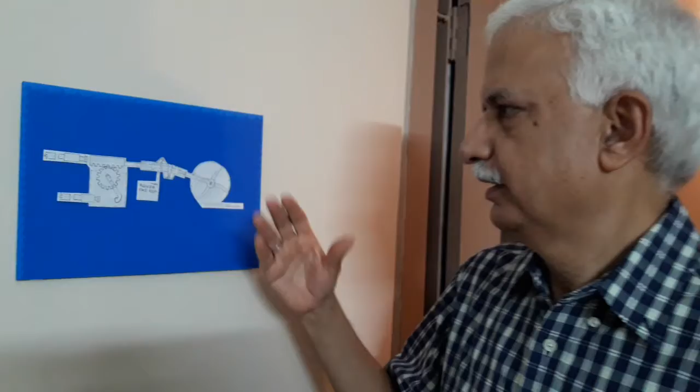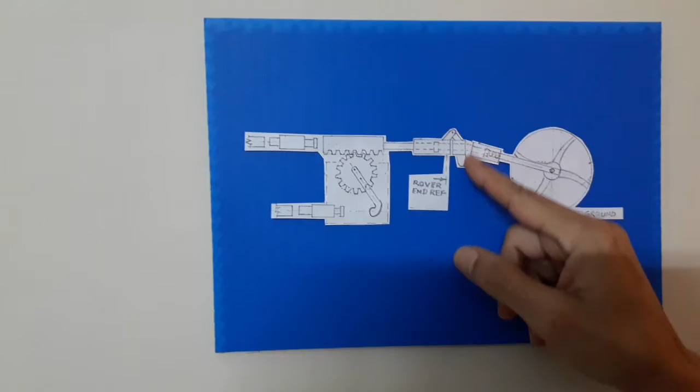Here you can see a spoked wheel mounted on a strut, which is cushioned inside a cylinder and connected to hinge number 1 and hinge number 2. This hinge is meant for opening in this direction, and this hinge is meant for opening in this direction.

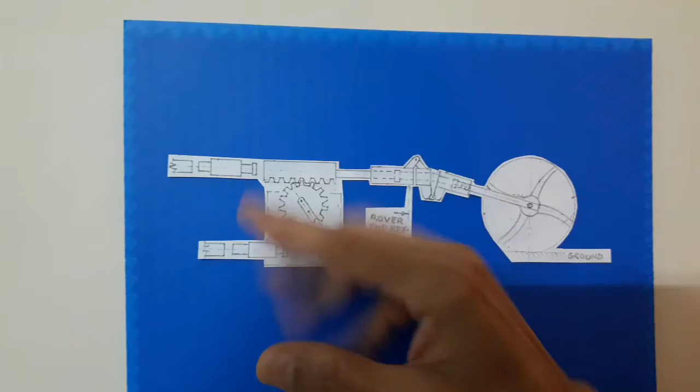Inside you can see a solid shaft which is the strut, a flexible shaft I've used here, and again a solid shaft. Here you can see a rack and pinion arrangement with an actuator, which is going to carry out the pressing of the pin.

So now how does it work? When the rover is moving in this direction, this wheel is going to roll on the ground. Here is the ground. Suppose this encounters a downward slope. Depending on the angle of the slope, the wheel is going to go down.

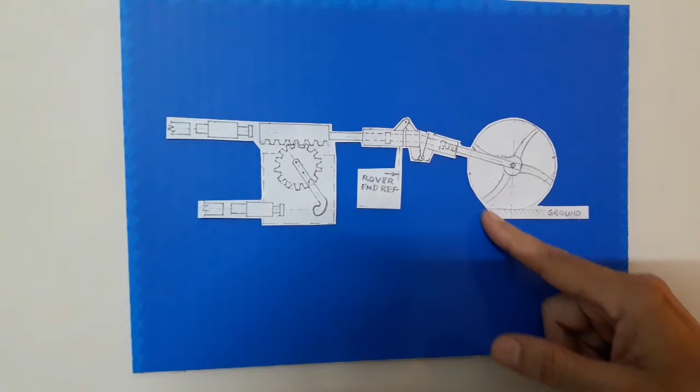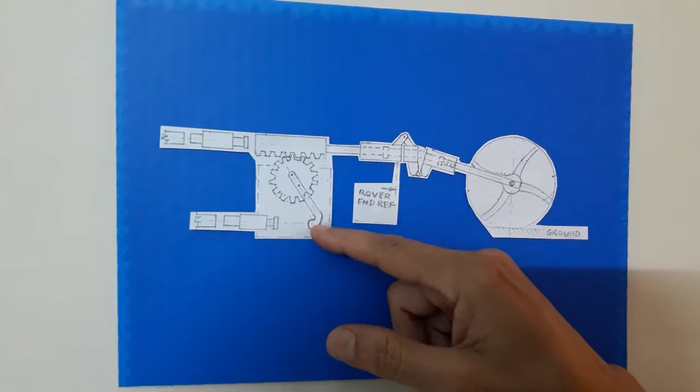When the wheel goes down, the struts move down and stretch the flexible shaft. This pulls the rack in this direction and moves the pinion in a clockwise direction. When the pinion moves clockwise, the actuator presses this ram, which presses the pin provided by NASA on the rover.

So I've talked about the downward movement. Now let's talk about the upward movement. For instance, there is an uphill task, a slope which is going up.

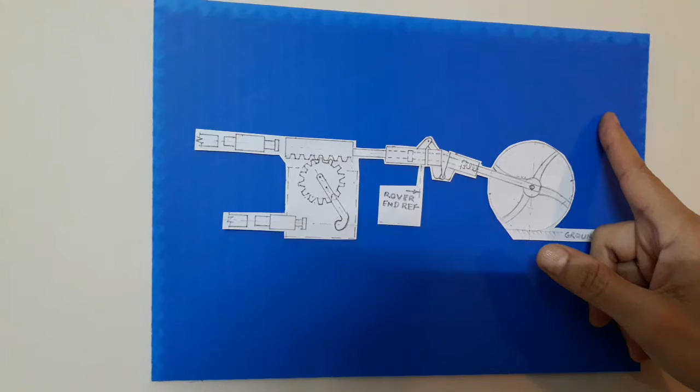The roller will try to climb the uphill journey, and this hinge will close. Now this hinge will try to open depending on the slope. When it opens, again the flexible shaft is pulled, and this pulls the rack in this direction and moves the pinion again in a clockwise direction, causing the actuator to press the pin.

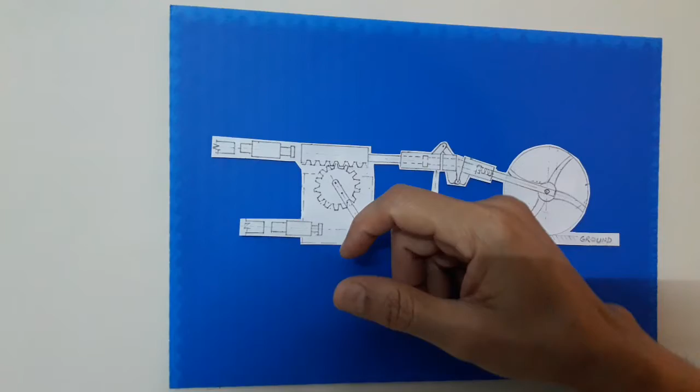Now suppose there is an obstacle of 90 degrees that doesn't allow the motion at all. Then this will press in this direction, and instead of stretching, there is a pressing force. The rack itself will move in this direction and press this ram, and this ram will press the pin.

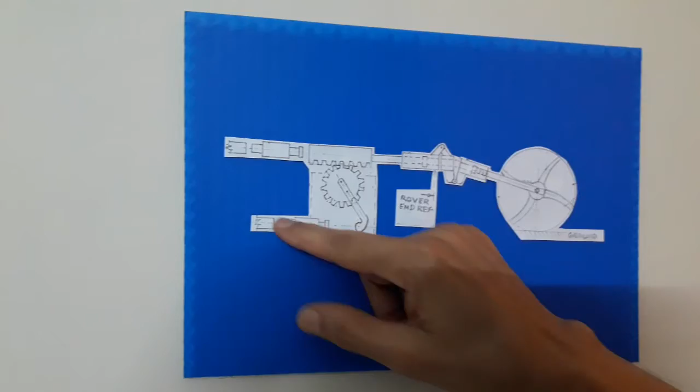So the actuation of the pins happens at two positions, depending on which direction the wheel is moving, up or downhill. Then I've shown here the references.

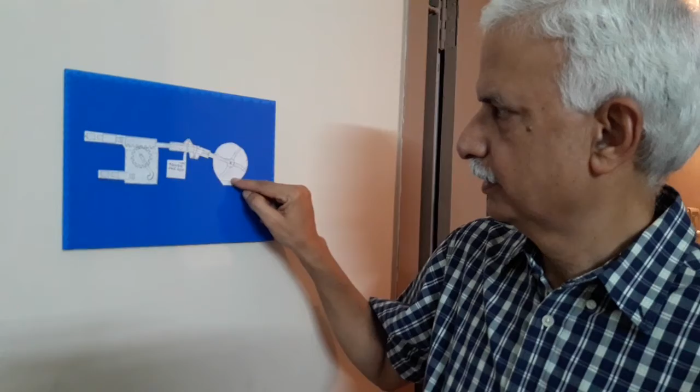I'm quite sure that this will be chosen as a solution. Thank you.